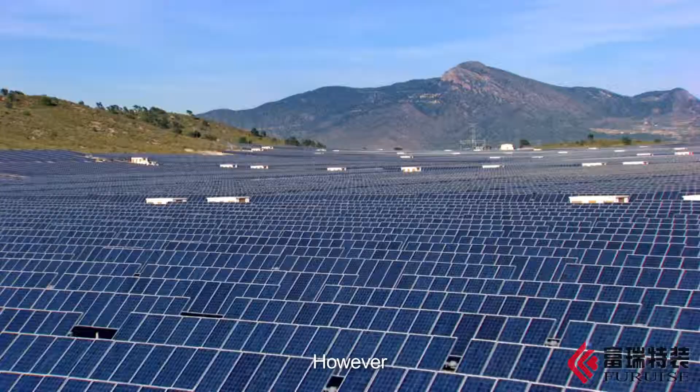Our vast planet contains a wealth of energy. However, with the acceleration of the global process of urbanization, oil resources have been excessively consumed, and we are now facing the global energy crisis.

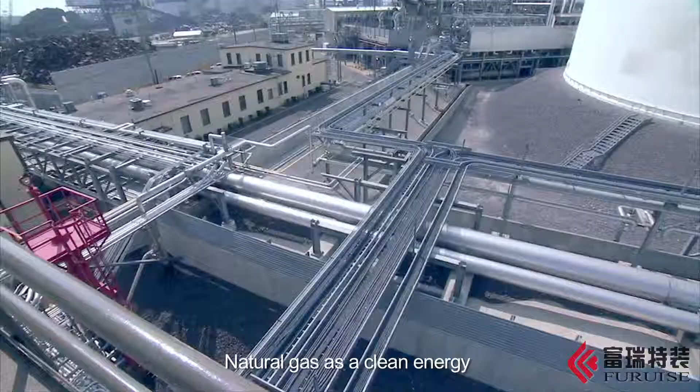Accompanying the country's energy security and energy diversification considerations, countries around the world are making great efforts to develop alternative energy for oil. Natural gas, as a clean energy, has been favored by many countries. In the nation's 11th five-year plan, an important guideline has been made to develop and utilize gas resources and use new energy as a substitute for traditional fuels. In the 12th five-year plan, an important special plan has been made for the development goals of natural gas.

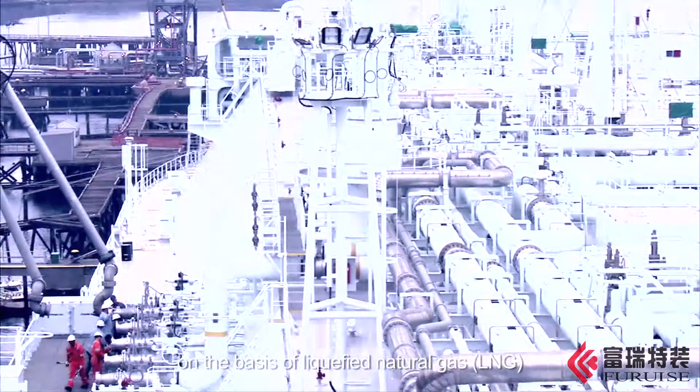With the mature development of natural gas technology and equipment, the application of natural gas has been widely used and developed on the basis of liquefied natural gas, LNG, and more responsive to the development trend. LNG, a greener, cleaner, and more efficient clean energy, will become the new darling of global energy.

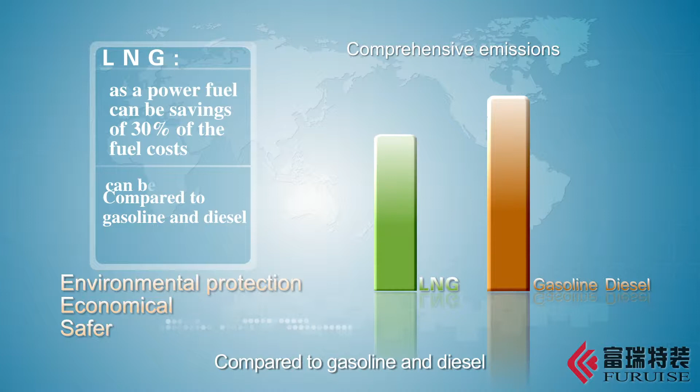The gas was cooled to minus 162 degrees Celsius, shrinking 625 times in volume, then becomes LNG. Referred to as LNG, as a power fuel it can mean savings of 30% of fuel costs compared to gasoline and diesel, and integrated emissions can be reduced by approximately 85%. LNG is easy to store, offers longer mileage, is safer, more economical, and better for environmental protection.

Key high-tech enterprise of the National Torch Plan. High-tech enterprise of Jiangsu Province, having a number of technology research and development platforms, such as the Jiangsu Province LNG Application Equipment Engineering Technology and Research Center, Jiangsu Province Enterprise Academic Workstation, etc. This is FURUISE.

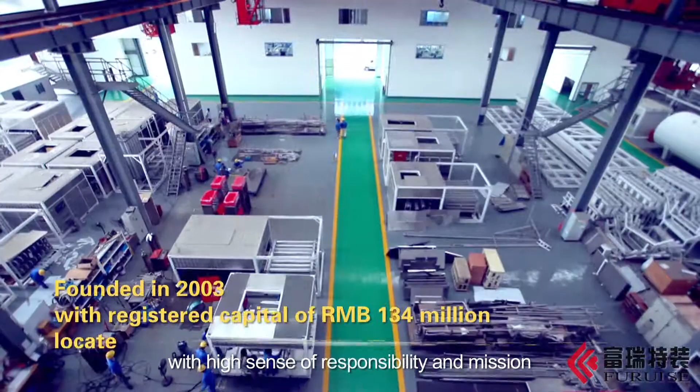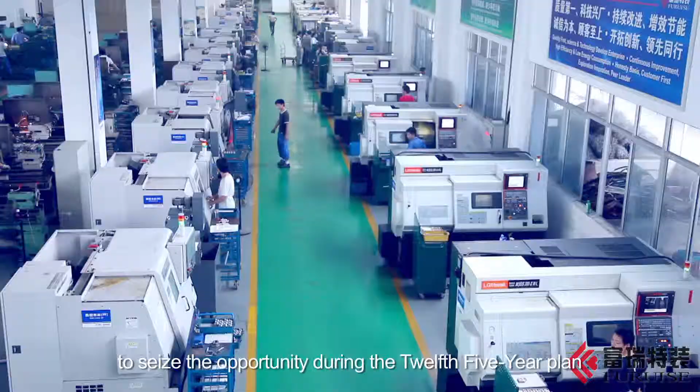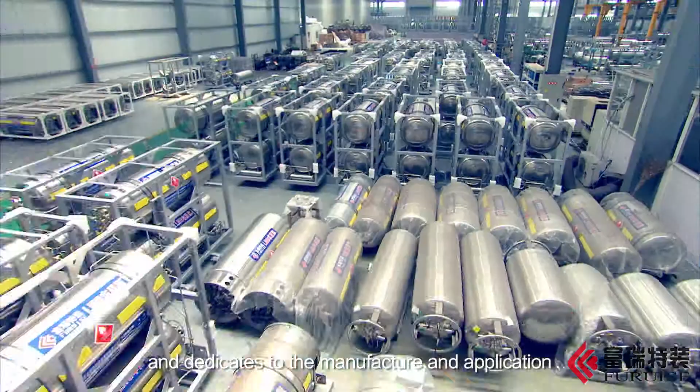Zhangjiagang Furui Special Equipment Company Limited, with a high sense of responsibility and mission, through overarching strategic thinking and vision, followed the national policy to seize the opportunity during the 12th five-year plan, and was among the first to join the LNG industry, from research and development and manufacturing of LNG industry equipment to after-sales service. The company continues its vocation and dedicates itself to the manufacture, application, and research and development of LNG industry chain equipment.

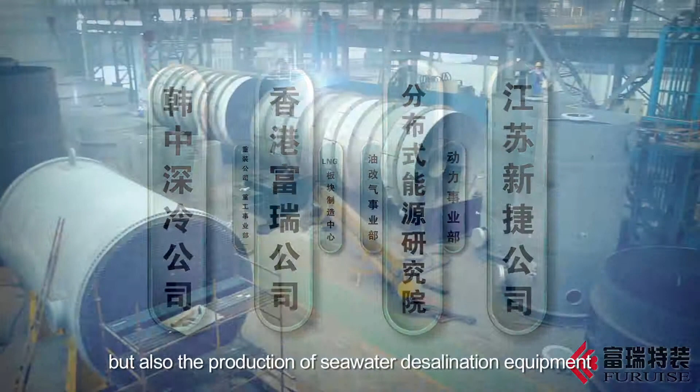The company consists of 6 divisions and 4 subsidiary companies, and also produces seawater desalination equipment, gas separation equipment, and supplies the whole LNG industry chain equipment for worldwide users.

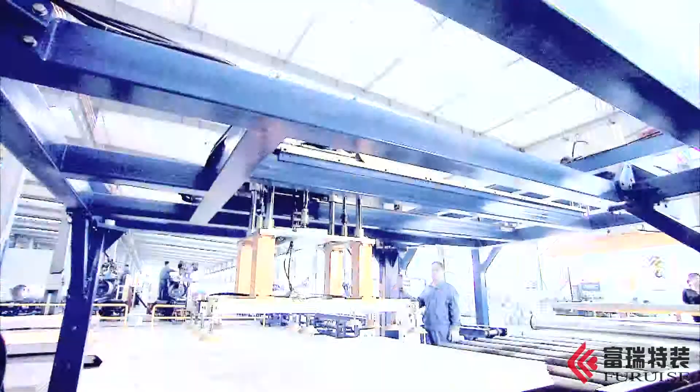Leading the complete LNG industry solutions, FURUISE is the only provider who can provide one-stop solutions and outfits in China. It has a complete industrial chain of LNG liquefaction, transportation, and storage, with more than 50% of the market in LNG cylinders for vehicles, LNG filling stations, and other products.

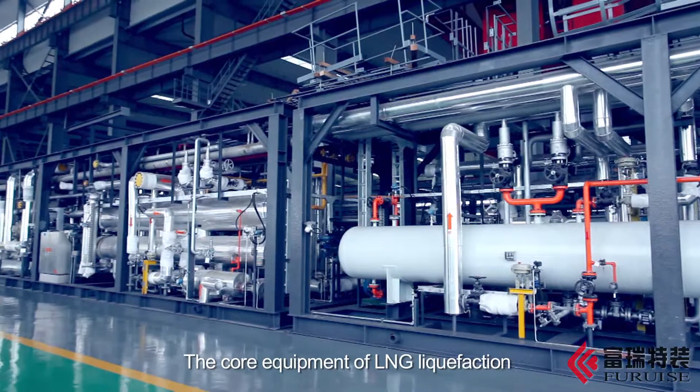The core equipment of LNG liquefaction is an integrated set of natural gas liquefaction equipment, which converts natural gas into liquefied gas through the process of purification and cool treatment.

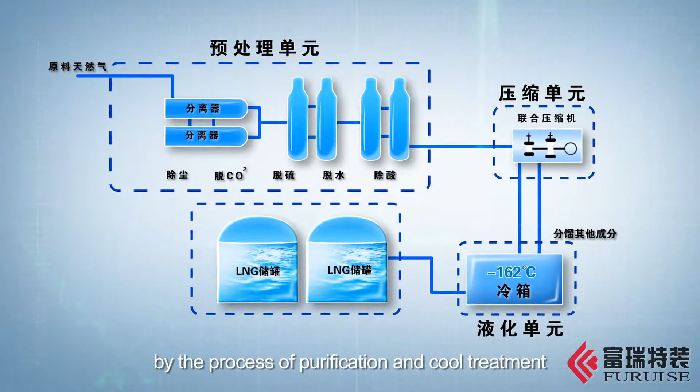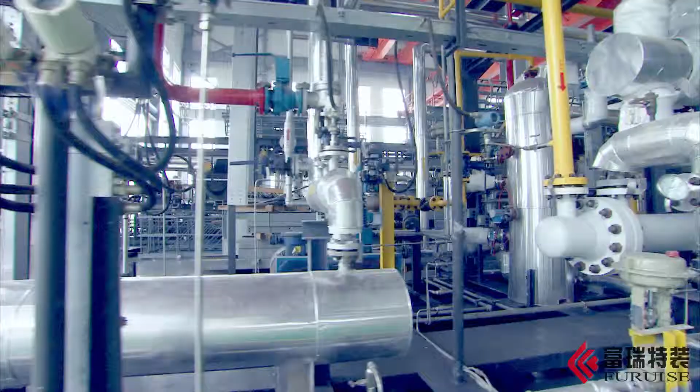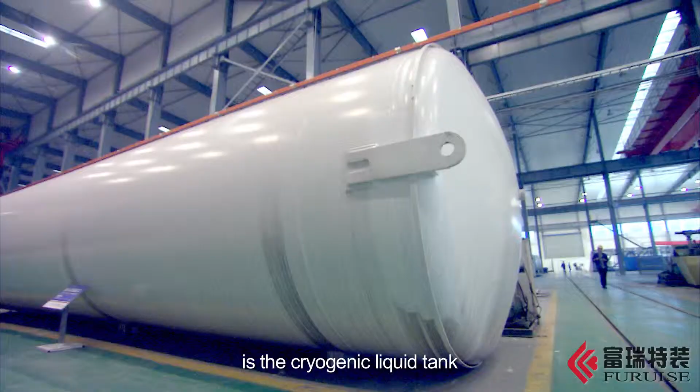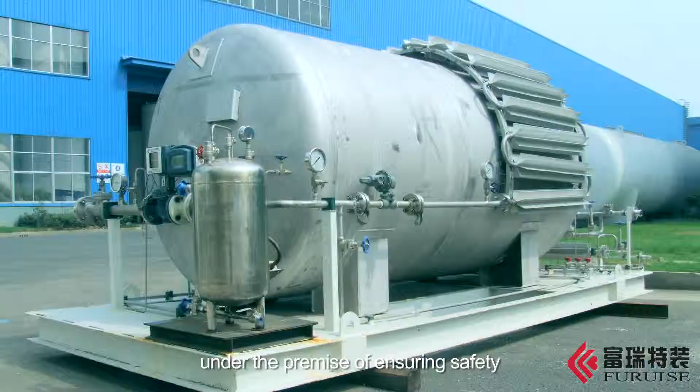The core equipment for LNG storage is a cryogenic liquid tank. The use of strain hardening technology for austenitic stainless steel can greatly reduce the design wall thickness of the cryogenic vessel under the premise of ensuring safety, thereby reducing the manufacturing costs of cryogenic tanks and improving the competitiveness of products in the market.

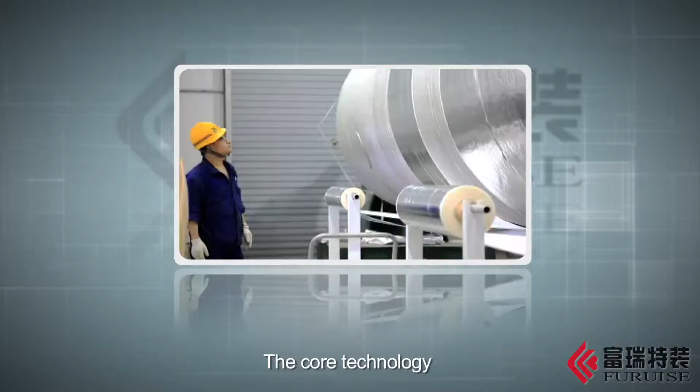The core equipment for LNG transportation is the LNG cryogenic liquid tanker and LNG tank containers. The core technology is multi-layer winding high vacuum insulation technology, a high vacuum technology product. It can provide the largest LNG cryogenic liquid transport semi-trailer.

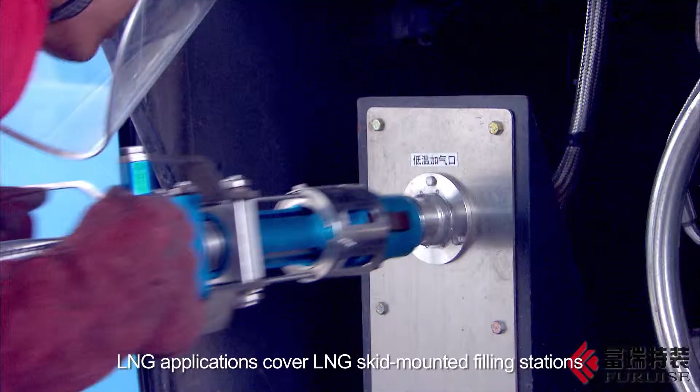LNG applications cover LNG skid-mounted filling stations, LNG vehicle gas supply systems, LNG marine gas supply systems, cryogenic complete valve devices, etc., which are the basic equipment for the rapid development of LNG clean energy.

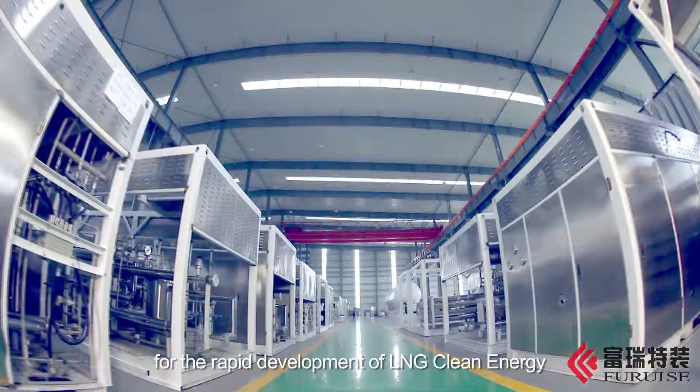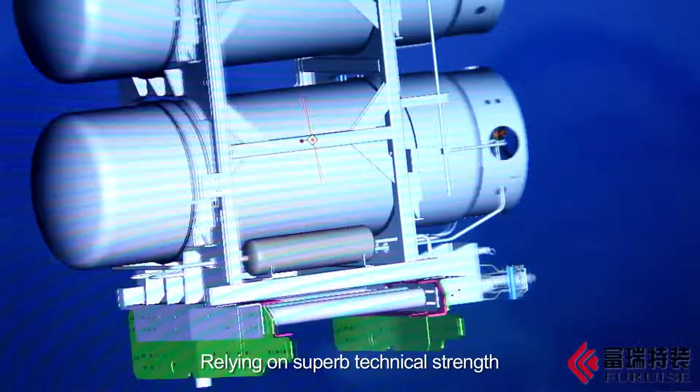Since 2006, the company began R&D of gas supply systems for vehicle cylinders and participated in the National 863 project in heavy-duty LNG special truck development. Relying on superb technical strength and successful research and development of self-pressurization systems with complete product specifications, the company has provided equipment for Sinotruck, Shaanxi Heavy Truck, Beiben, FAW, DFAC, Yutong, Kinglong, and other bus producers.

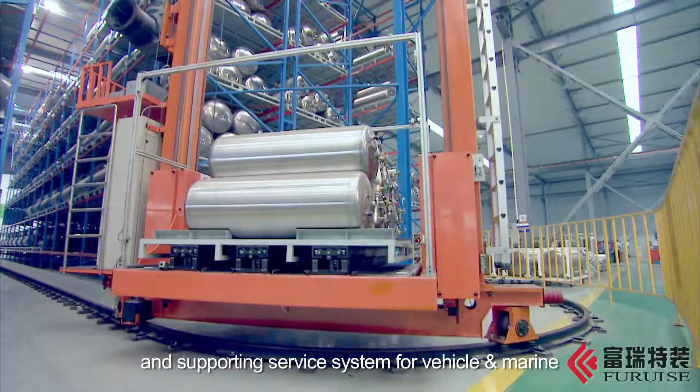In 2009, the company successfully developed the first set of LNG marine gas supply systems, offering mature gas supply system equipment and supporting service systems for both vehicle and marine applications.

FURUISE presided over the subject of the National 863 Technology Plan for Energy Saving and New Energy Vehicles, researching and developing Mobile LNG Skid-Mounted Filling Stations, which passed acceptance in 2009. The company successfully developed the domestic first set of mobile LNG vehicle skid-mounted filling stations, with successful product marketing and operations leading the development of the LNG industry, known as a revolutionary breakthrough in domestic LNG applications.

The company leads in developing enterprise specifications and participates in the development of industry and national standards. With the strength of EPC, it provides hundreds of filling stations for customers, with superior product technology and comprehensive indices achieving the ideal target of zero emissions during equipment operation.

On June 8, 2011, full of confidence, FURUISE successfully listed on the Shenzhen Stock Exchange GEM and became a leader in the LNG special equipment industry.

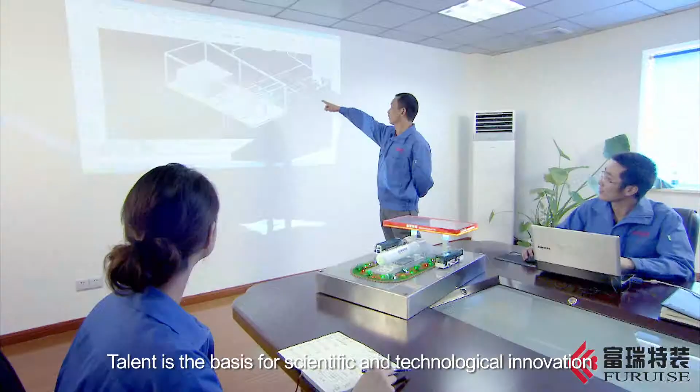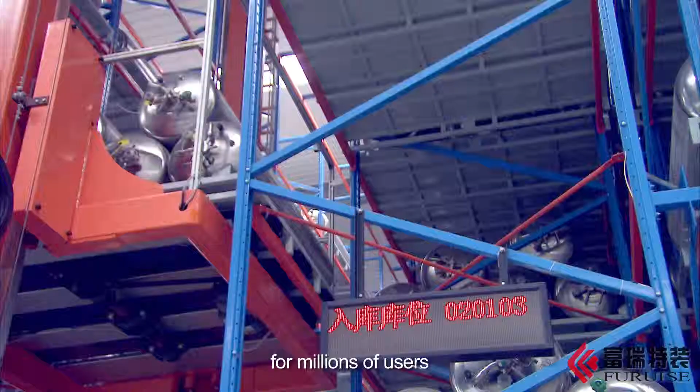Talent is the basis for scientific and technological innovation. FURUISE, relying on a strong R&D team with the concept of environmental protection and energy saving, constantly introduces new environmentally clean energy application technology, providing higher value-added products for millions of users. The company has obtained qualification for more than 10 items and holds more than 80 authorized patents of all kinds.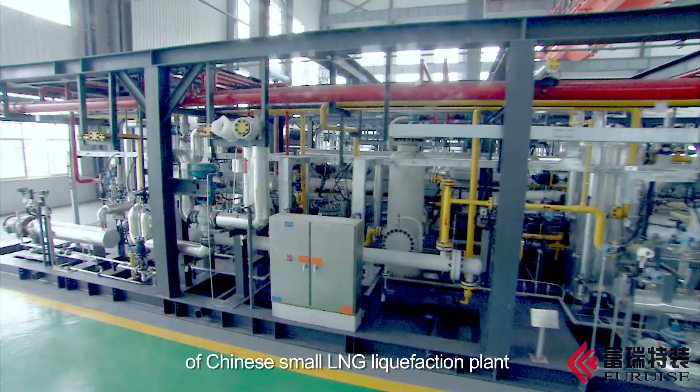FURUISE is forward-looking and leading the era, dedicated to becoming an industry legend. The company set up the LNG Application Equipment Engineering Technology Center, cooperating with Shanghai Jiaotong University, dedicated to the research and development of Chinese small LNG liquefaction plants and the promotion and implementation of LNG industry chain solutions.

In February 2010, FURUISE signed a cooperation agreement with the National Defense Science Key Laboratory of Equipment Remanufacturing in automotive engine remanufacturing and oil-to-gas technology and industrialization.

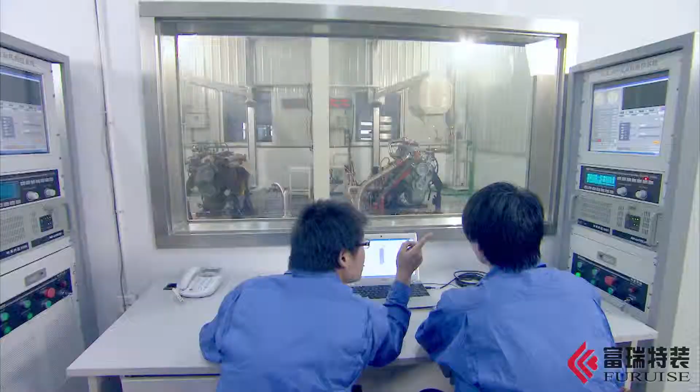In addition, FURUISE also cooperates with Southeast University, Lanzhou University, China Automotive Engineering Research Institute, and other research institutes, continuously improving LNG industry and equipment manufacturing technology and marketing applications.

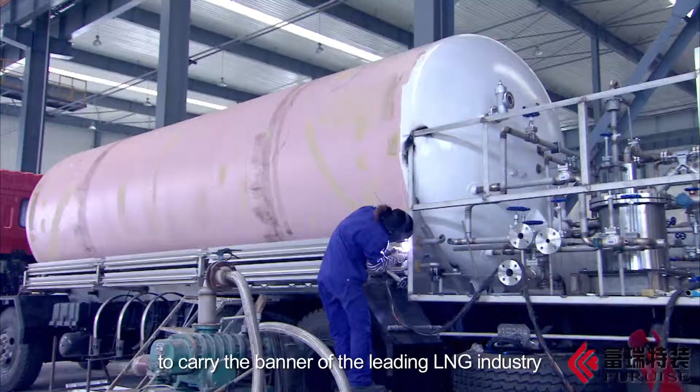FURUISE carries the banner of leading the LNG industry and contributes its efforts to the rise of the LNG industry with strong R&D strength.

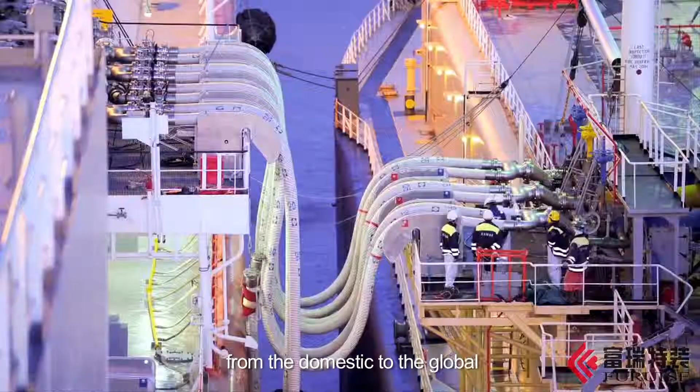From land to ocean, from domestic to global, FURUISE is always making efforts to be the most professional worldwide service provider in the industry.

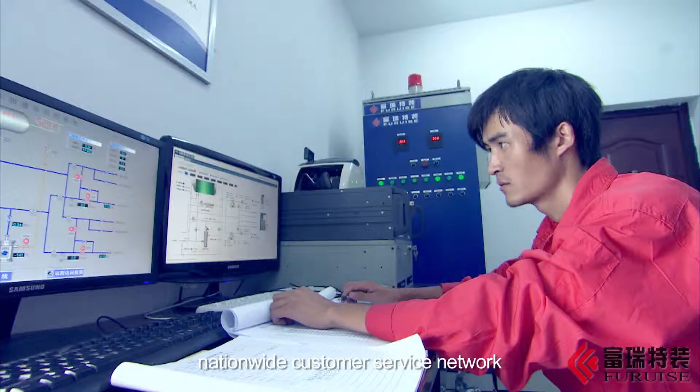24 hours a day in response, one-to-one services, a nationwide customer service network, and an ultra-long quality commitment build the leading service brand. FURUISE adheres to customer first and fully implements the development strategy of both excellent products and services.

Every smile, every encouragement, every customer's recognition, every firm handshake is the forward power of FURUISE people.

In-depth cooperation with many famous international auto companies now supports LNG heavy-duty trucks and LNG buses used in Xinjiang, Inner Mongolia, Shanxi, Shandong, Jiangsu, Zhejiang, Guangdong, and other provinces and cities. 24-hour service stations are established in the main regions of the country to provide service for each terminal LNG vehicle.

FURUISE has established strategic alliances with CNPC, CNOOC, Sinopec, Guanghui, ENN, and other energy companies, as well as Weichai, Yuchai, Shanghai Diesel, and other engine manufacturers, and CNHTC, China FAW, Yutong, Qingling, and others, carrying out in-depth cooperation in the LNG industry.

FURUISE, with one heart and one mind, has won the reputation in the industry for its good after-sales service over the past decades and achieved the global grand vision of LNG industry layout in China.

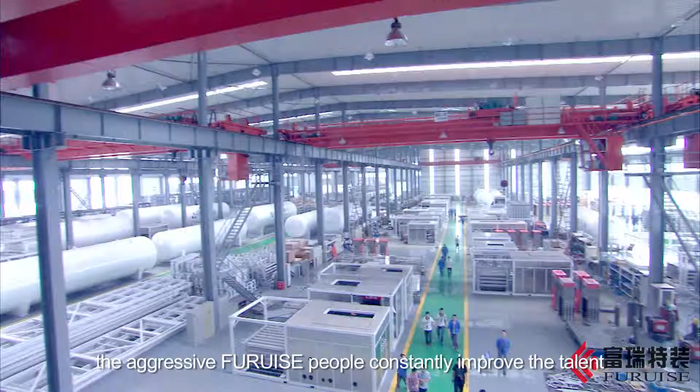Every day, the aggressive FURUISE people constantly improve their talent with one heart and one mind, constantly opening up new markets and achieving win-win cooperation with customers, and also returning to the community with gratitude and undertaking corporate social responsibility.

Standing at a new starting point, FURUISE will continue to work in good faith, practicing its commitment to open a new century journey.